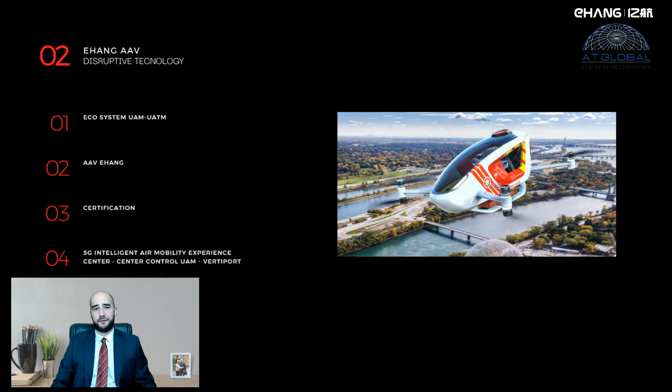As for our presentation, first we'll discuss the ecosystem of urban air mobility (UAM) and urban air traffic management (UATM). Then we'll introduce the cutting-edge technology of Ehang's AAV, further elaborating on the certification process, and finally concluding with the newest 5G intelligent air mobility experience centers for UAM control with the vertiports.

First of all, why is urban air mobility needed? Well, just in 2019, the congestion cost for Brazilian drivers came to an average of 650 reais per family, coming to a grand total of over 267 billion reais in the country.

Now that's a lot of wasted money, but not only material resources - we are also the 5th country in the entire world for motor vehicle traffic injuries, with about 1 death for every 24 seconds. That's a sad number that goes into the 7 figures when we see this perspective in a year span.

But not only from the unfortunate injuries, but all drivers spend an average of 12 days of the year just sitting in traffic congestion. Imagine how much more time to spend with your family, or the more businesses that can be generated just by reducing this wasted time.

According to the Barr Foundation, the Boston Metropolitan Planning Organization, and the World Economic Forum, the aggregated transit asset management from 2025 until 2040 is estimated at $302 billion of revenue.

Not only that, but it's estimated that from 2022 to 2050, as urbanization is increasing, there will be 3.9 billion passengers in this market, with a total of over 106,000 eVTOLs, since it's estimated that 70% of global population will be living in an urban area.

The Ehang headquarters are located in the Huangpu district in the city of Guangzhou, China. Now let's go into this cutting-edge technology that is the new Ehang eVTOL, our EH216 AAV.

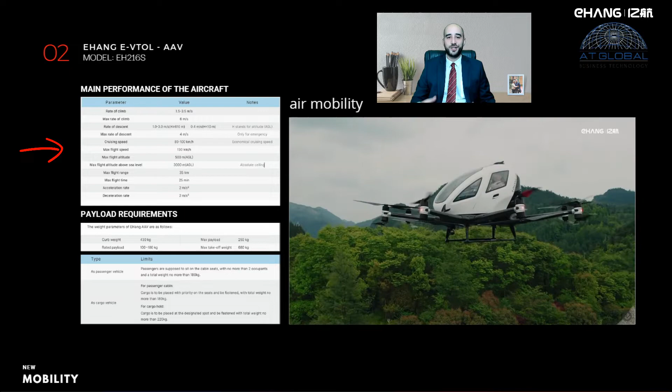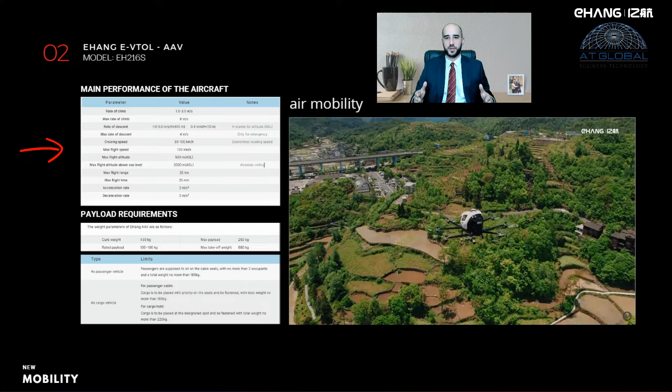On our S model, on the main performance of this aircraft, we have a smooth rate of climb that ranges from 1.5 to 3.5 meters per second, with a maximum of 6 meters per second if needed. On the descent, it keeps a safe and trouble-free rate of between 1 and 3 meters per second, while above 10 meters, going down to about 0.4 meters per second when reaching ground level at less than 10 meters.

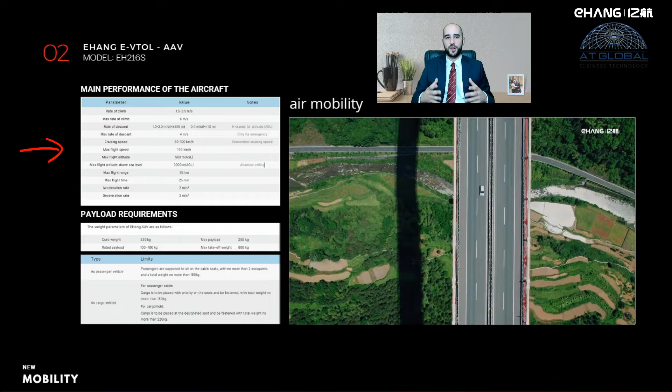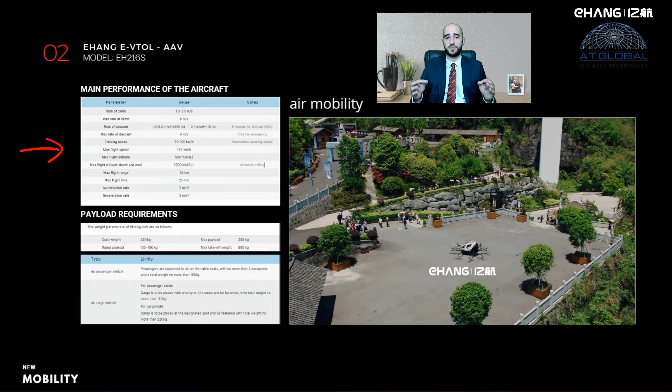On an economical cruising speed of about 80 to 100 kilometers per hour, reaching a maximum of 130 kilometers per hour, the EH216 has a 500 meters above ground level max flight altitude, with a maximum of 3,000 meters absolute ceiling above sea level. It comes with a maximum flight range of 35 kilometers in a straight line, with 25 minutes of flight time autonomy, and both acceleration and deceleration rates are about 2 meters per second squared.

For the payload requirements, the weight parameters of the Ehang EH216 AAV are: curb weight at 430 kilograms, with a rated payload of between 100 and 180 kilograms, a maximum payload of 250 kilograms, and therefore a maximum takeoff weight of 680 kilograms.

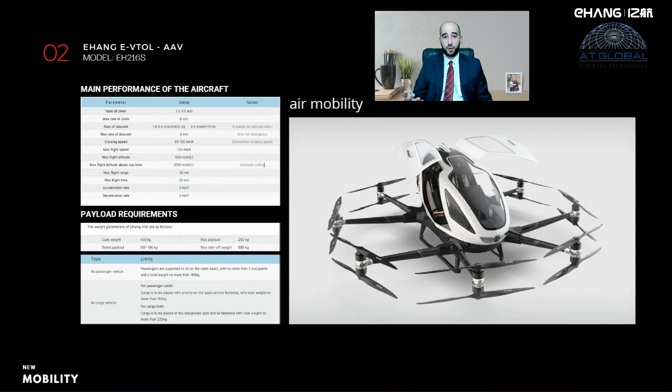As a passenger vehicle, the limits are that passengers are supposed to sit on the cabin seats with no more than 2 occupants at a time and a total weight of no more than 180 kilograms. As a cargo vehicle, for the passenger cabin, the cargo is to be placed with priority on the seats and properly fastened, with total weight no more than 180 kilograms, and for the cargo area it is to be placed on the designated spot and fastened correctly with a total weight of no more than 220 kilograms.

On our amazing ambulance model of the EH216, together with the Ambular 2.0 services, there can be a medical emergency or a disaster that breaks out, and the Ambular 2.0 services are requested. The AI then sorts out the location, assigns the vehicle, and properly allocates the nearest paramedic available for the operation in an expedited way. The AI also handles the commute, which is controlled by a pilot remotely.

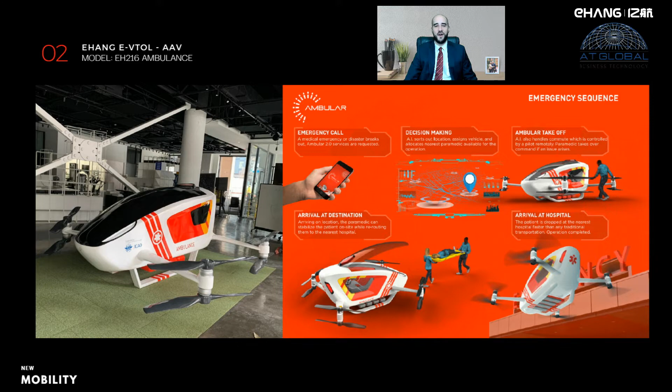The paramedic takes over command if any issues arise. When arriving on location, the paramedic can stabilize the patient directly on site while rerouting them to the nearest hospital, and the patient is dropped at the nearest hospital faster than any traditional transportation, and the operation is successfully completed.

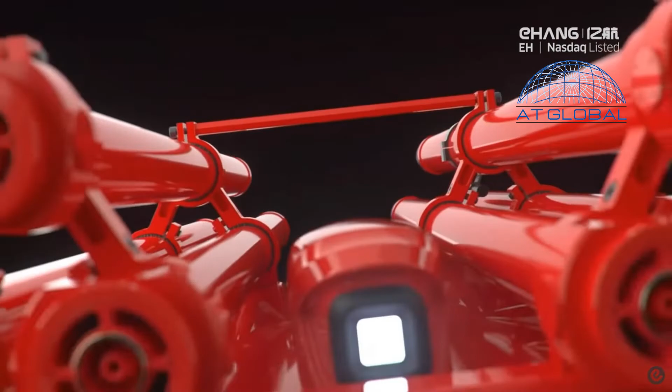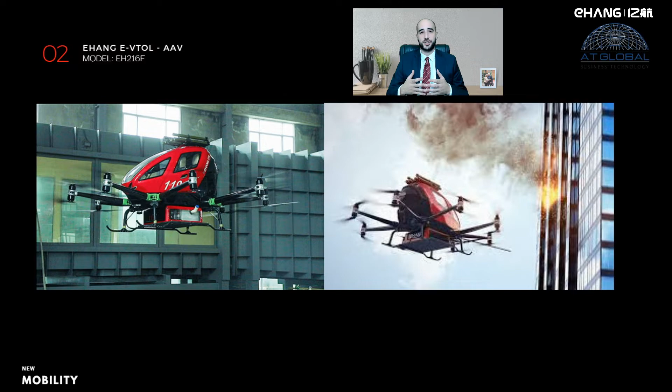Our firefighting unit will also be able to quickly bring a big payload of water or any firefighting chemical to the correct location, and allied with the AI and the controlling pilot can disperse through the installed nozzle into a precise area in order to not only minimize the damages, but also greatly increase the safety of our noble firefighters, therefore reducing potential casualties and time consumed to arrive at the location.

The Falcon Series B model comes with a distance travel of 10 kilometers of autonomy that takes about 20 minutes to perform, and can be repeatedly done several times on the same day. It also has up to 20 kilometers of autonomy that will be done in about 45 minutes when carrying cargo, a trip that can be performed about 4 times in a day.

The EH216L model will come with a cruising altitude of about 200 meters, while they're recommended to be up to 120 meters for better results, and a flight range of up to 35 kilometers, while maintaining a cruising speed of about 50 to 80 kilometers an hour with a maximum of 130 kilometers an hour.

The estimated flight time is about 25 minutes, and you can adjust to actual conditions on the final return altitude, the takeoff and the return altitudes.

The climb speed in flight route is at a default of 2 meters per second with a maximum of 3.5 meters per second, while the descending speed en route has a default of 1.5 with a maximum of 2 meters per second. In micro control, the default is about 10 kilometers per hour with up to 20 kilometers per hour according to the need, while the max descending speed when returning and when landing is at a default of 1.5 with a maximum of 2 meters per second.

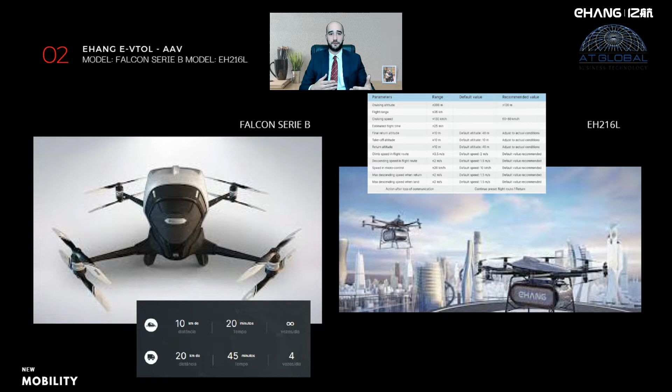If there is a loss of communication, the AI will be able to continue with the preset flight route or return the equipment in order to acquire communication, ensuring safety of both the unit and its cargo.

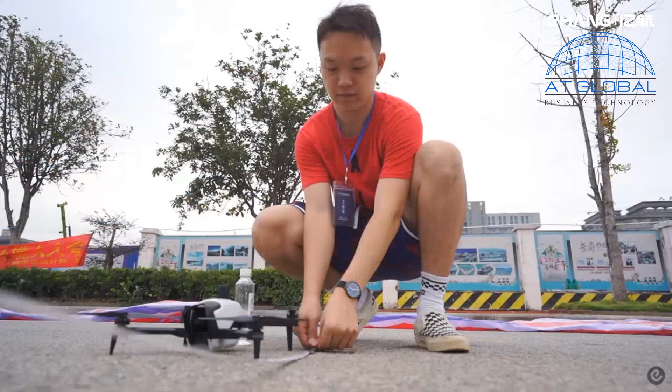In 2016, the Governor's Office of Economic Development in Las Vegas and the Nevada Institute for Autonomous Systems signed a historical agreement with Ehang for the research, development, creation, and sale of intelligent aerial vehicles. In 2017, the Flight Command Center was built and experimental continuous flights took place with the Ehang 184 unit. Also in 2017, Ehang received the AS9100C certification, a standard of management systems of quality for the aerospace and global aviation industry. In the same year, Ehang also partnered up with the government of Shaoguan to build a smart city with a command center and UAV systems.

When we go into the year 2018, Ehang, already a global leader in unmanned aerial vehicle technology, revealed the first images of manned passenger drones with the Ehang 184, which was the first drone in the entire world capable of carrying a person up to 130 kilometers per hour through extreme conditions like a Class 7 hurricane.

Later in 2018, Ehang achieved the Guinness World Record by performing a light show in a 3D formation with over 1,300 drones dancing over the walls of the city of Xi'an on April 29. Also in 2018, Ehang partnered with Yonghui, a food company from China, to launch the first ever Chinese food delivery made by drones.

Now, between 2019 and 2021, the unit has flown in more than 10 countries, with the model EH216 performing over 100 different flight routes and about 2,800 flights.

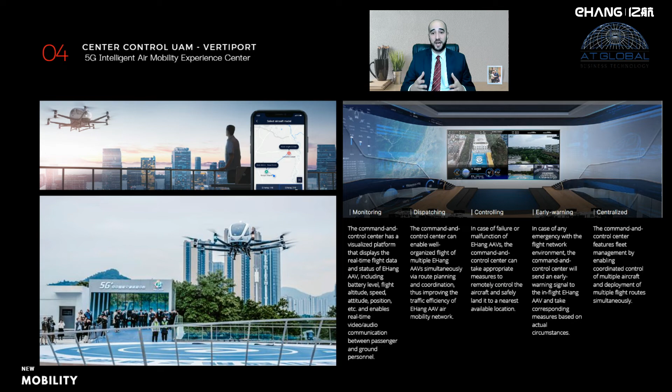On the Command and Control Center, there's a feature of fleet management, enabling coordinated control of multiple aircraft and deployment of multiple flight routes simultaneously.

With all of that being said, we want to create more smart cities like the one we have in Guangzhou, and together with that, we'll be able to cut public expenses, generate thousands of jobs, and improve air mobility. Not only this, but on this entire ecosystem, there are several segments and uses that we have not yet observed - new services and utilities that will allow for even greater use of the AAV technology with our Ehang EH216 model.